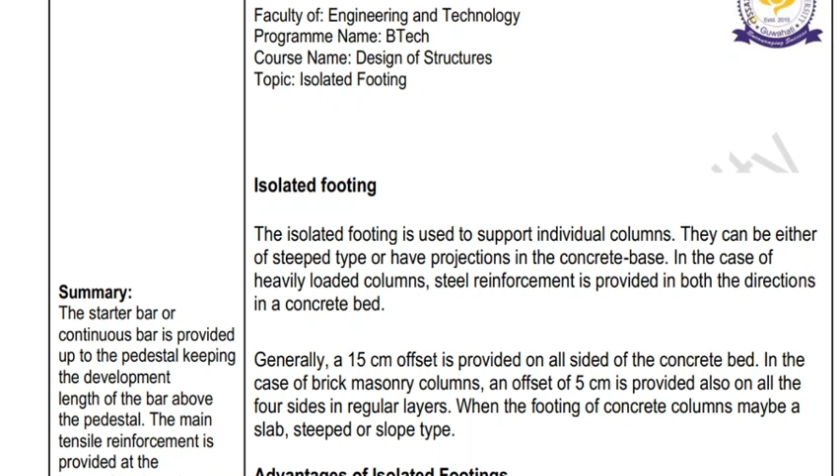Now they can be either of step type or have projection in the concrete base. Step means there will be stepping in different bases. In the case of heavily loaded columns, steel reinforcement is provided in both directions in a concrete bed. Both directions means in the horizontal as well as in the vertical direction. Generally a 15 centimeter offset is provided on all sides of the concrete bed.

Now in the case of a brick masonry column, an offset of 5 centimeters is provided on all 4 sides in regular layers. For the footing of concrete columns, it may be a slab, stepped or slope type.

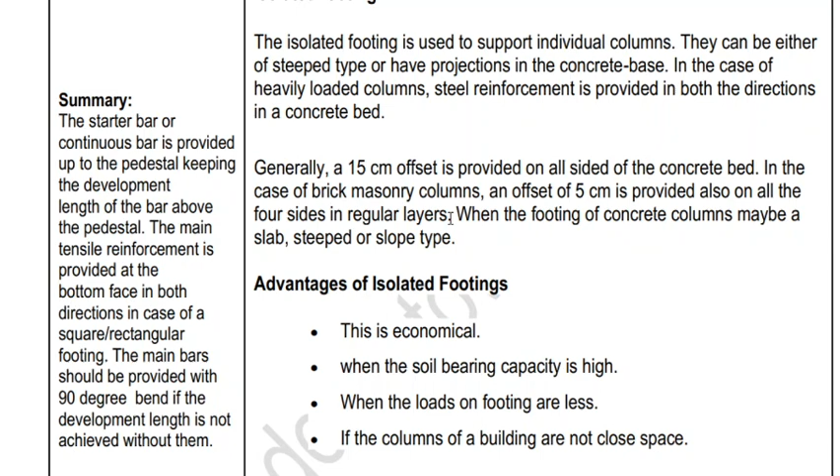Now these are some advantages of isolated footing. The first advantage is that it is very economical. Next, when the soil bearing capacity is high, you only provide isolated footing. Then when the loads on the footing are less, and if the columns of a building are not closely spaced. If they are closely spaced, you need to go for combined footing.

When the loads on the footing are more, you can go for either combined footing, raft foundations, pile foundations, etc. And when the bearing capacity of soil is very low, based on the condition of the soil, you can go for pile foundations, combined footing or raft foundations.

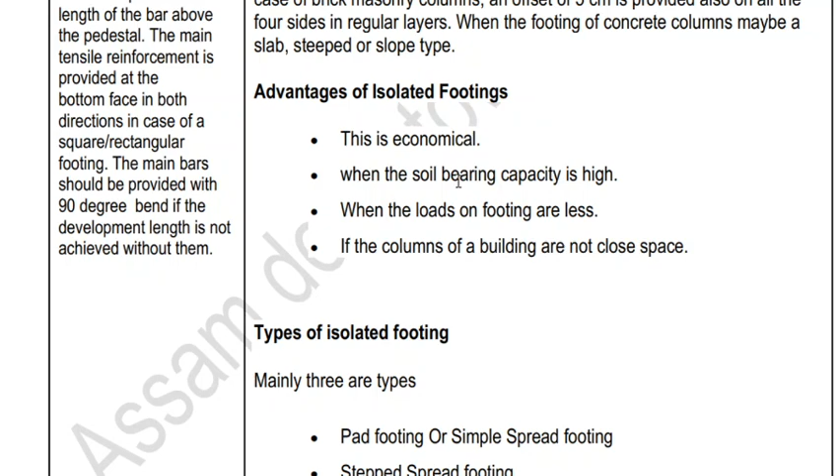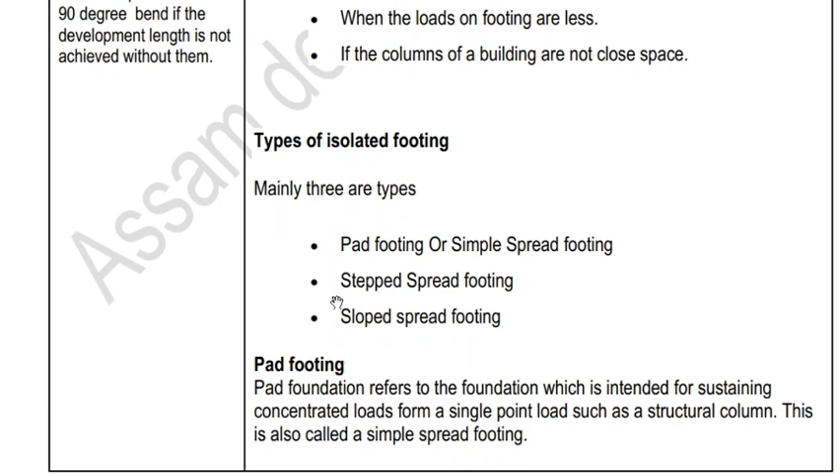Now, types of isolated footing. Basically there are 3 types: pad footing or simple spread footing, stepped spread footing and sloped spread footing. So let us discuss the different types. The first one is pad footing. Pad foundation refers to a foundation intended for sustaining concentrated loads from a single point load such as a structural column. So basically your foundation or footing will be attached to the column.

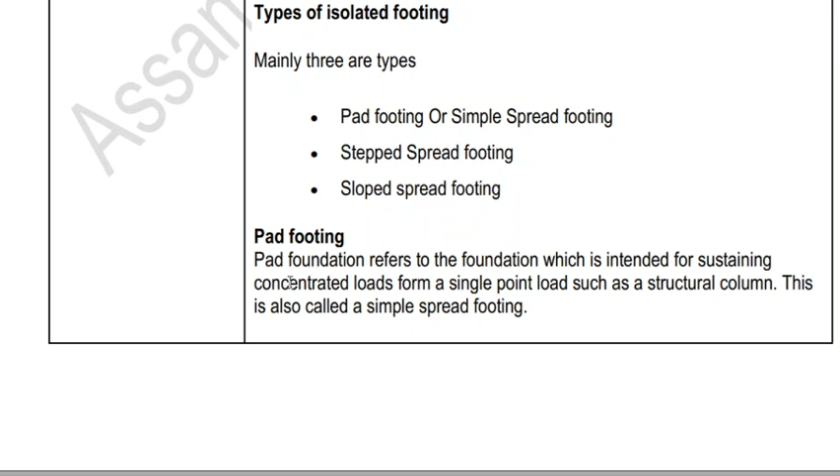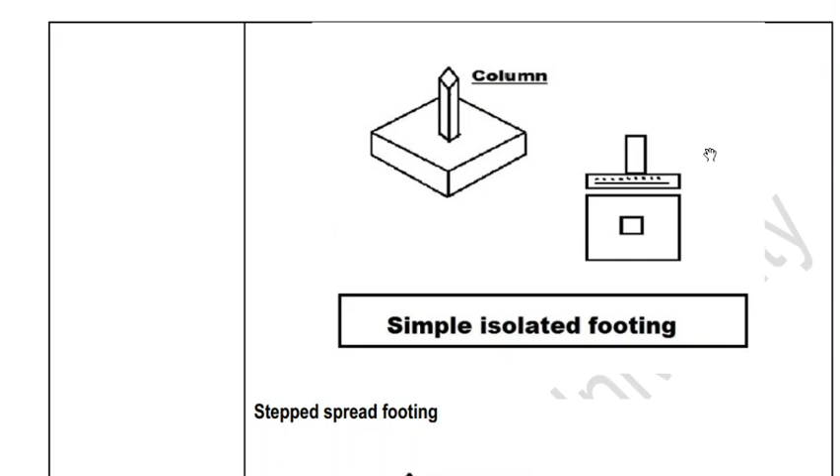Whenever a concentrated load will be applied on the footing, pad footing is considered. This is also called simple spread footing. One base would be there, and on that base the column would be provided. This is simple, and in some cases reinforcement would be provided. This reinforcement can be provided in 2 directions or in a single direction. So this is simple isolated footing or pad footing.

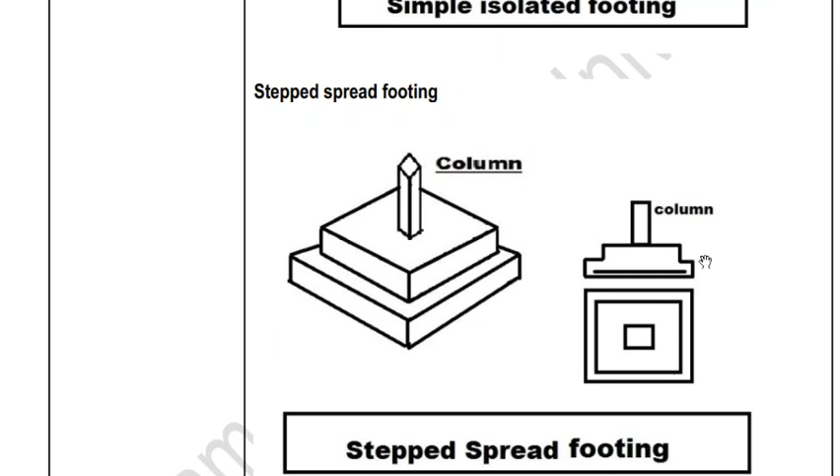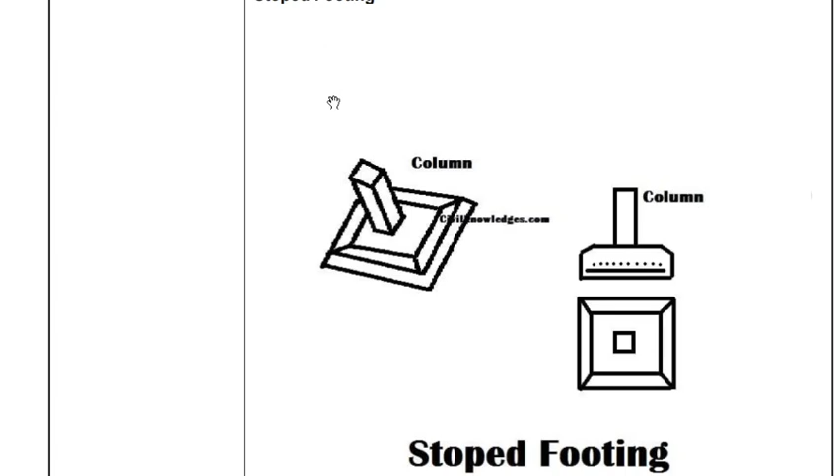So in the sloped footing, what happens? This is a single base and this is another base. This portion is elevated, and after that another base will start. In the top view it will look like that, and in the cross section it would look like this. This is the column, and over here this portion is slightly cut to make this sloped footing.

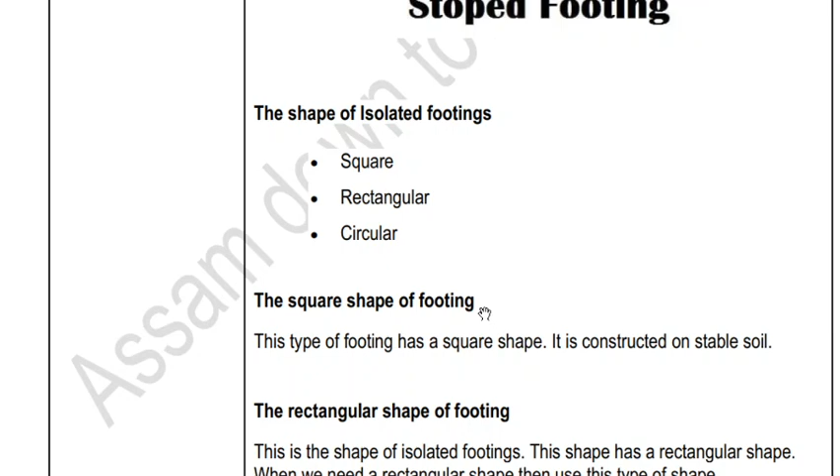Now the shape of isolated footing. It may be square, rectangular, or circular. The square footing has a square shape and it is constructed on stable soil. When the soil is stable, in that case it is provided.

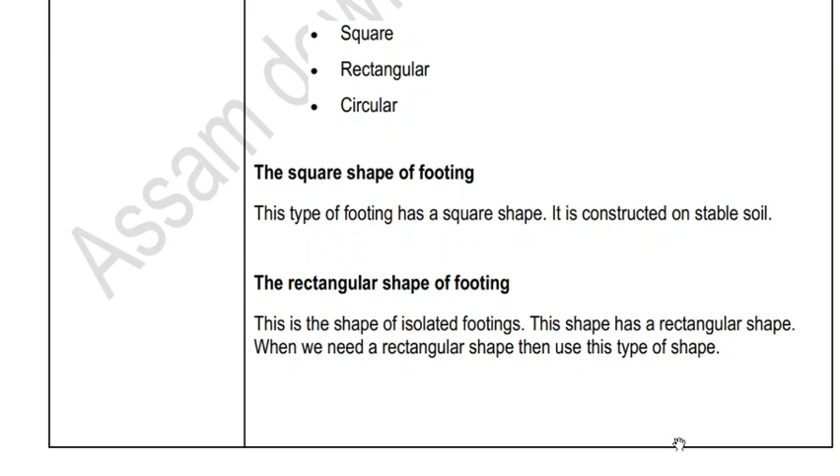Now the rectangular footing. This shape of isolated footing is rectangular. So when you need a rectangular shape, use this type. Suppose we need to construct a rectangular building. In that case you cannot provide a square or circular shape, so you have to provide the rectangular shape of footing.